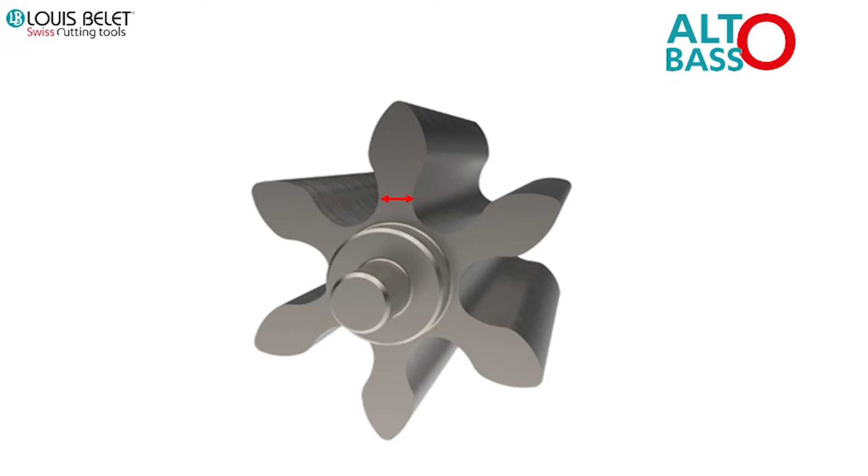However, due to the profile height, the same issue can also happen in larger dimensions. What kind of problems? For this kind of dimension, the problems are multiple. As you can see on the left-hand side, there is some material removal on the top of the tooth, randomly performed. This is due to bending of the teeth while cutting, and the next cutting tooth comes and cuts the top of the wheel.

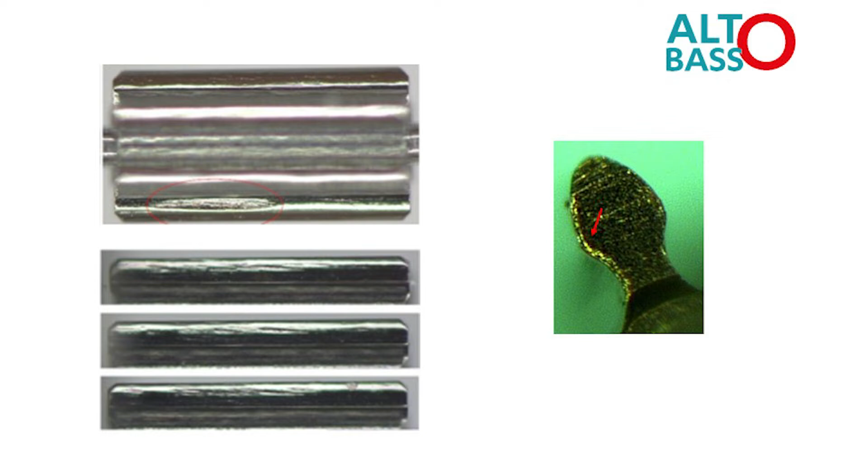On the right-hand side, on this green picture, you see a crenulation - it's the type of bite that you can see on one side of the teeth. It's a typical problem for that kind of teeth. And lastly, most of the time while hobbing this kind of part, the teeth come out of production too thin - a deformation, out of spec for this kind of teeth.

So we could do the hobbing for this kind of part, but as explained, the part comes out of production out of tolerance. The customer came to us and said your hob, your cutter, is not good. We asked them to bring back the cutters, and we found out that all the dimensions of the hob were okay and in good shape. But as you can see on the picture, there is a lot of stress while cutting the complete tooth.

So we had a full process of brainstorming and research to find the cause and root cause of this bending during the hobbing process. We did some simulation, as you can see in the picture. This finite element simulation showed us there are a lot of forces applied over the entire height of the tooth, and most of the stress, although it's all over the teeth, leads to the minimal distance of the tooth having the most stress.

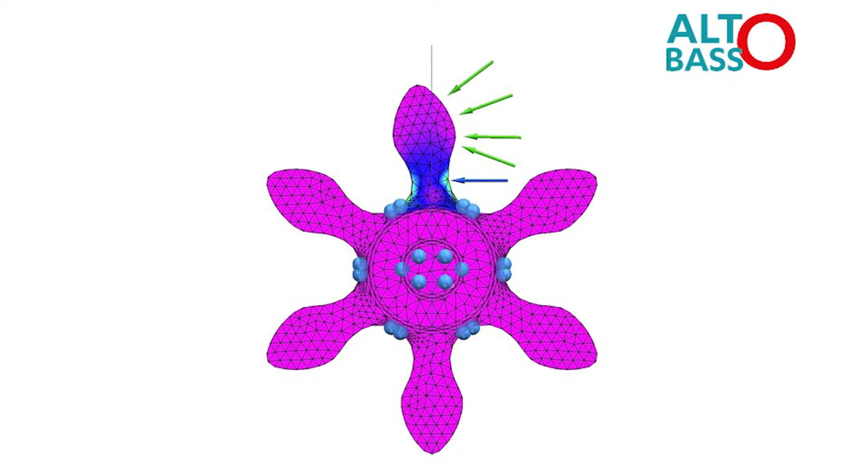So where you can see the green color on the back, that's the bottom of the teeth. This means that during a traditional hobbing process, the leverage arm is so important that the tooth bends and is machined in a random way.

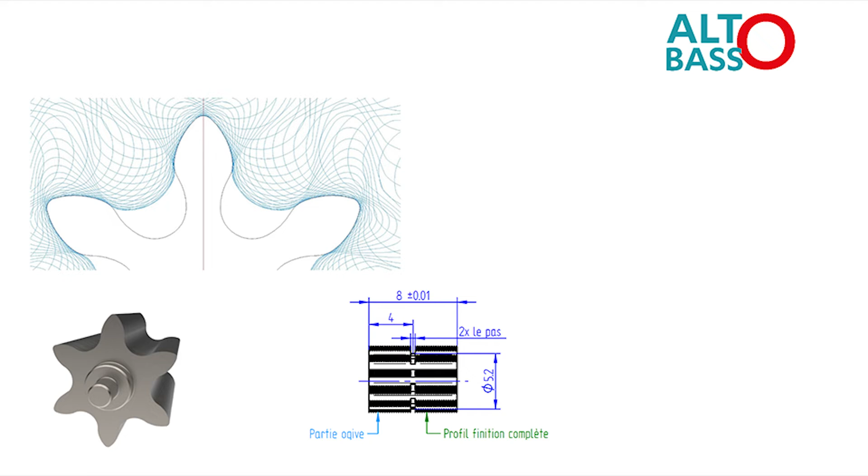So what came out of this brainstorming was to simply reduce this leverage. How to do this? That's where we came up with the AltoBasso way. It's actually a cutter in 2 parts. We first do the larger part to make the tip of the wheel, the profile basically. After the first part, the left-hand side of the hob will be done in this shape. On a second step, we do the bottom part. So 'alto' from the top in Italian, and 'basso' from the bottom - AltoBasso. It's a 2-step process allowing you to produce this kind of gear profile without bending the tooth while producing it.

Here you see the force on the part while cutting. It's clear from the example that the lower arm makes the cut much more robust. When you machine the top of the tooth, you have the stress on the left. The AltoBasso has a very short lever arm, and therefore the tooth doesn't bend.

On the right, since the ogive is already finished - the top already produced at the first pass - the basso cut, the lower part, has a very low rest point, and therefore the tooth doesn't bend either. This is indeed what happened with our customer, and this is why the AltoBasso is the solution for this particular shape with high and thin teeth.

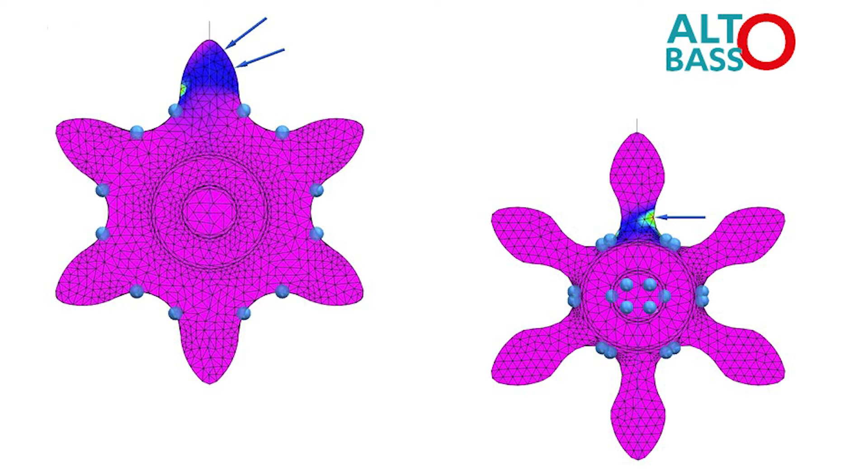So basically the force X, which we consider the chip removal force applied on the tip of the tooth as in traditional hobbing, logically bends the tooth a lot in the standard way. The same force applied to the AltoBasso lever point bends the tooth much less, as we can see in the two simulations. On the left-hand side, once more, the first cut, the Alto, and on the right-hand side, the Basso, where you can still see some stress, but much lower than with only one pass.

So this is how the AltoBasso hob drawings look. That's what you will get from us, and you can find all the information to validate it and make it good for production, for us to launch the production.

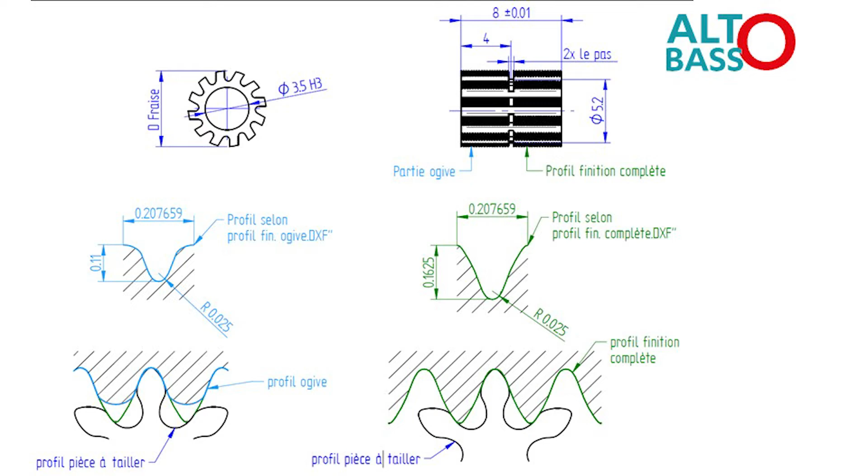An additional trick was imagined to help you speed up the setup time. The distance between the two sides of the hob is very precise and a multiple of a pitch, usually 2. This allows you to simply give the exact shifting distance to reach the position to cut the second part, the Basso part. If needed, we can also send you the DXF file for the Alto cutting profile.

At Louis Belet, we try to always be one step ahead with our products. You may be familiar with our burr-free cutting methods, the duplex cutters, for which we've dedicated a webinar that you can find on our website. What we did was combine these two technologies in the same product, making an AltoBasso duplex. You can see how this looks like.

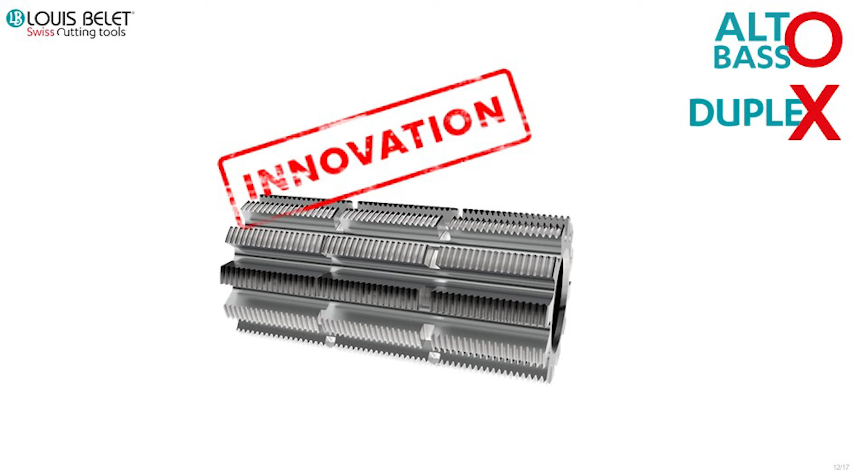We can grind it pretty easily in our homemade grinding machines. You can produce really thin and high profile gears without burrs in 3 steps: the Alto, the Basso, and the so-called duplex parts. Here as well, you can see the drawing we will send you for validation before production.

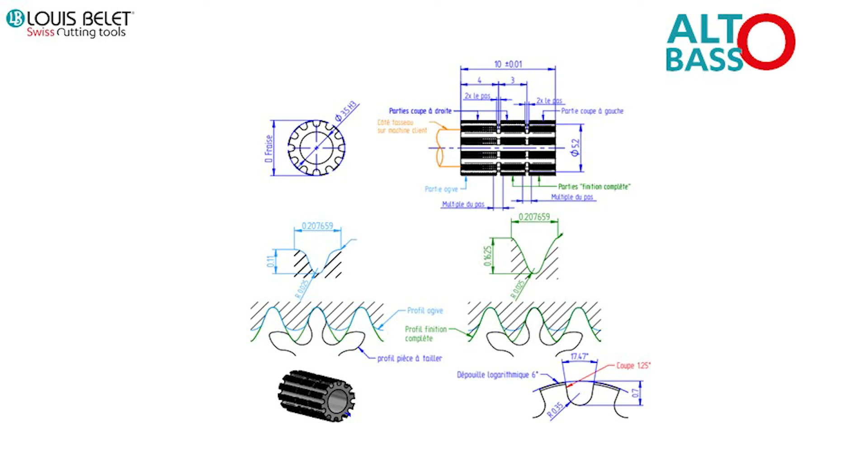Here as well, I mentioned the distance between the two parts of the Alto and Basso—this is also true for the duplex. You have a multiple of the pitch between each step of production, so you can easily set up the machine. So if you have this kind of gear with fine and high teeth to produce, the AltoBasso hob is your solution. So I come now toward the end of my presentation. I don't know if you have any questions on that.

Oh yes, I do have 2 questions. Okay, so is this principle only applicable to the hobs?

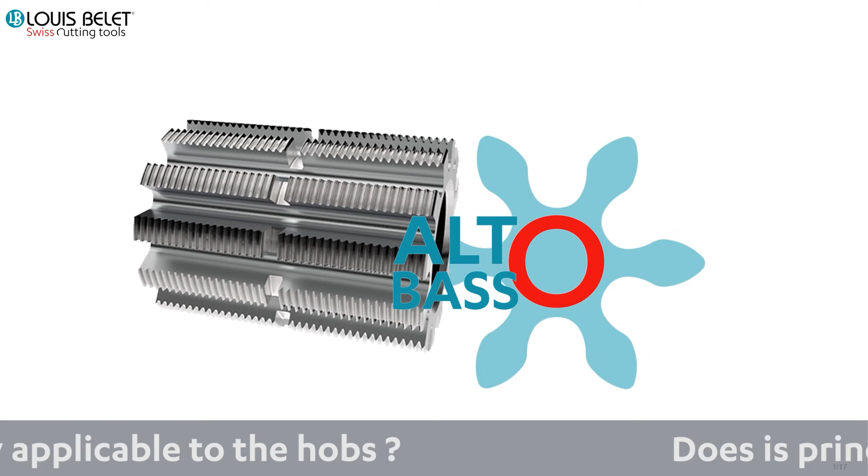What is the price of an AltoBasso compared to a standard one? I was sure we were coming to the price question.

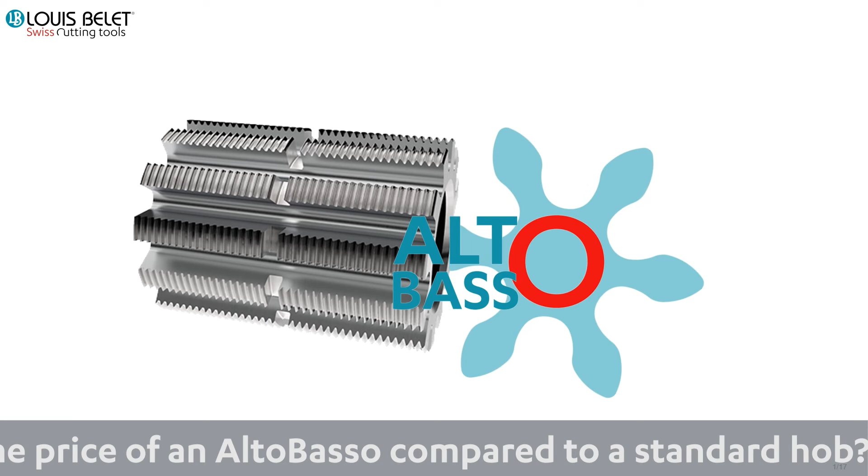So if you have a diameter, let's say 6 by 8, a standard hob with 6 by 8, you have one price. It will be the same price for an AltoBasso of diameter 6, with 2 parts of 4 millimeters, so 2 times 4 millimeters. The only difference is an additional one-time setup cost for programming the second shape of the cutter. So it will be the same piece price, but the setup cost will be a bit more expensive.

Will the transition between the Alto and Basso cutting leave a distinct line on the part? That's a good question. Actually, no. Why is that—is it the size?

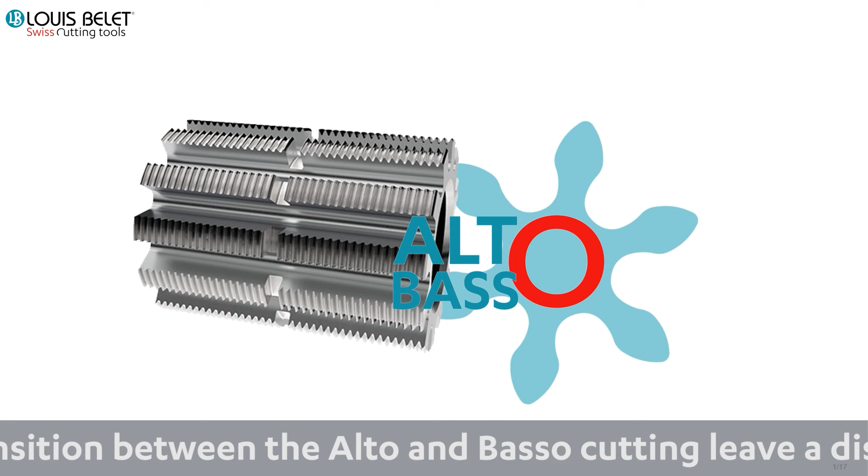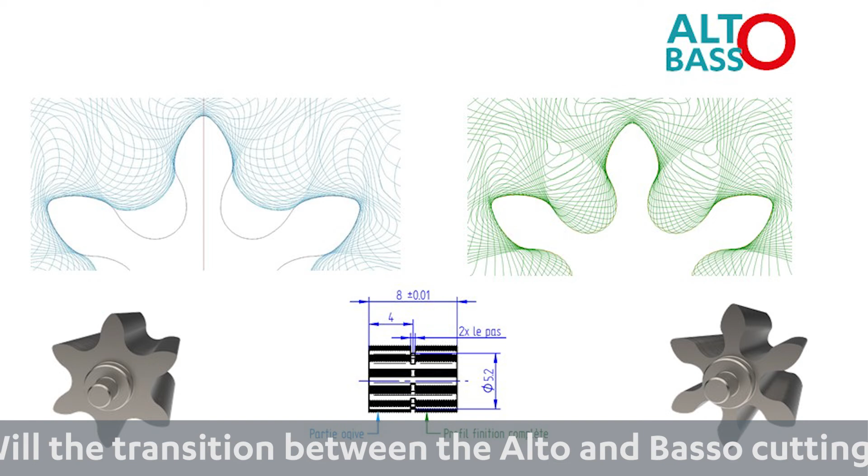Let me go back to the parts here. On the left-hand side, you have the blue part, and the blue part will be cut, but it will be some microns above the dimension, above the profile of the green part. So we simply cut a little bit more of the complete profile with the second pass. You will have practically no stress on the second cut because the tip is already done, but you still remove some microns in order to make the profile completely clear.

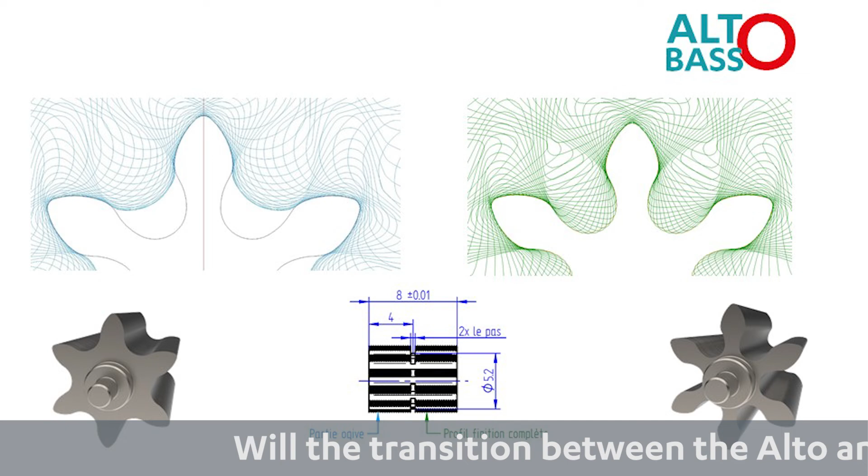Does this type of hobbing require a symmetric profile? Actually, for hobbing, yes—a standard cutting by generation, a standard hob, yes. But we can also do this AltoBasso on our other types of cutting, like the index or whatever. So you can also have a non-symmetrical profile for producing this kind of technology, the AltoBasso.

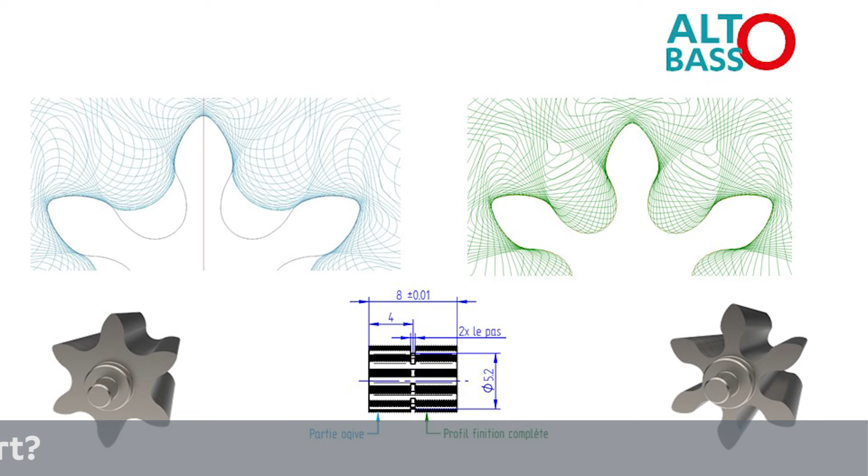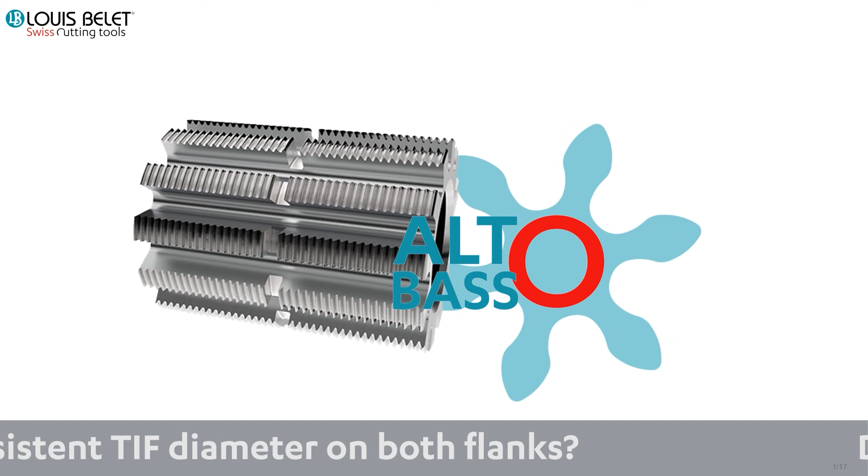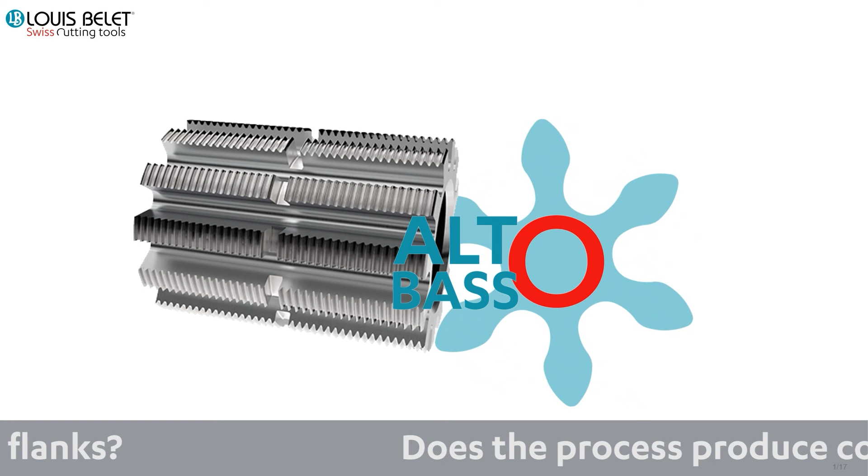I have another question: does the process produce consistent TIF diameter on both flanks? I think you're pointing to whether the cutter is a topping part. If this is the case, we can do both, but generally for a really tipped profile, the way of cutting the gear is a topping way. Yes, the TIF is involute form diameter. Well, we can do involute or non-involute—we can really produce any kind of shape.

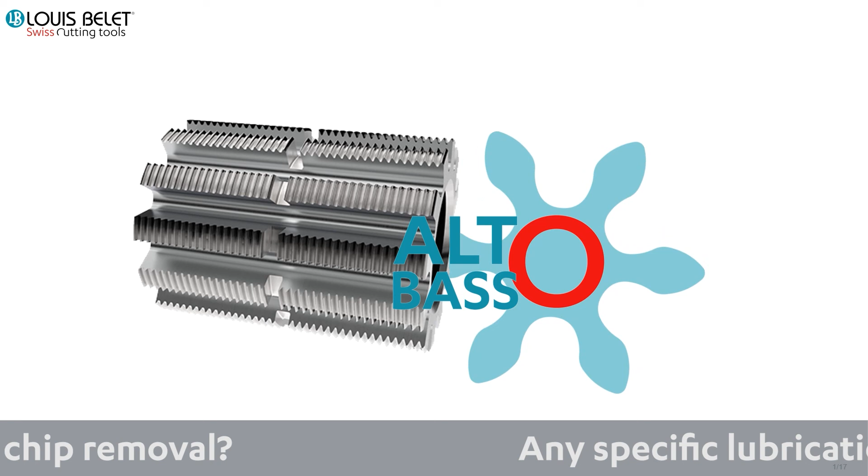I have here another question—just need to get my mouse on the right side. Any specific lubrication required or recommended chip removal? It's a bit of an over question on that part. It's nothing different than standard hobbing, so I would say no specific lubrication is needed, because it's really a two-step hobbing process, so it won't change anything on the hobbing process.

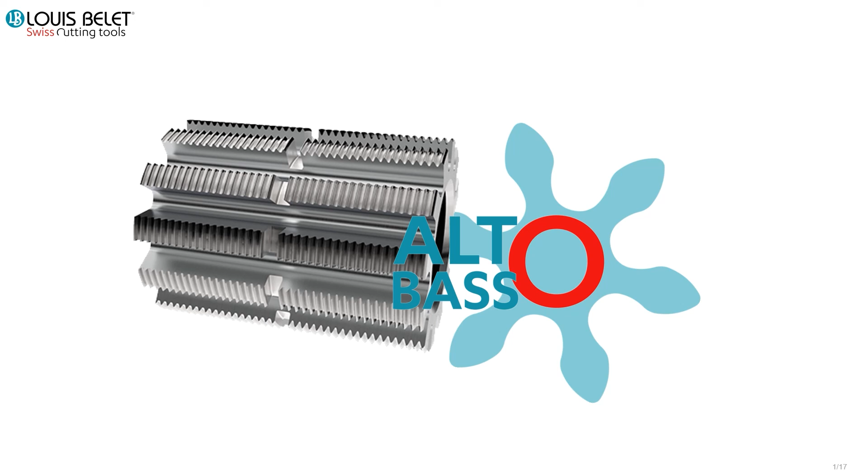I don't know if there are any other questions. Thanks a lot for this—it's always good to have communication and a bidirectional discussion. It's much appreciated. Okay, so if there's nothing else, let me conclude.